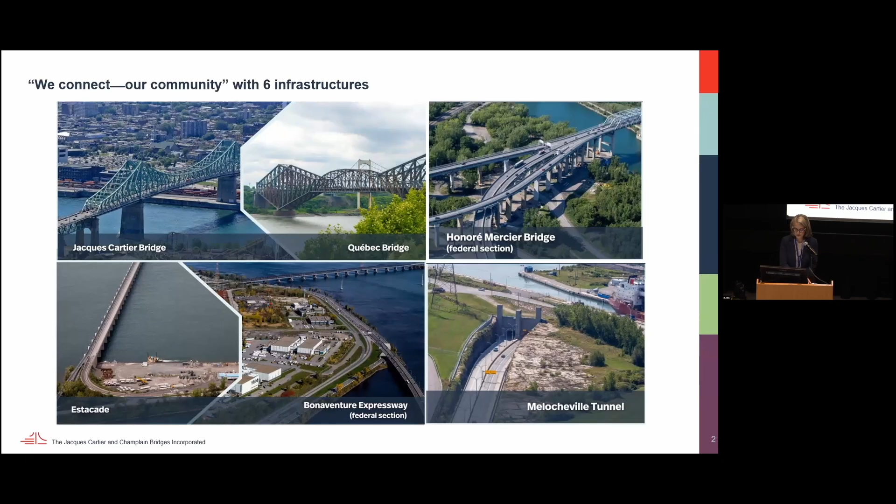Through our proactive asset management approach, we ensure these critical assets remain safe, functional, and aesthetically pleasing for as long as possible. Our team of 187 employees includes 54 engineers, and we are responsible for a total of 82 million trips per year and about 700,000 trips for active mobility users.

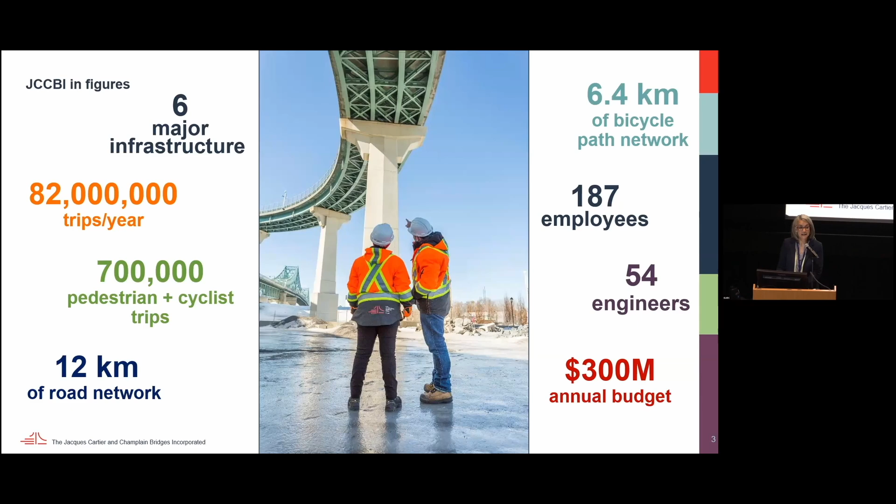Now, let's take a closer look at the deconstruction of the original Champlain Bridge.

JCCBI has managed this bridge since 1978. Due to structural problems, for decades we had to deploy innovative reinforcement solutions to keep the bridge fully open to traffic until its last day of operation on June 28, 2019, 57 years after its opening. I'm sure you can understand how emotional it was for us to deconstruct this bridge that had been under our care for so long.

At the same time, we were eager to tackle the challenge of deconstructing a major 3.4 kilometer, 6-lane traffic bridge without resorting to blasting and while upholding major sustainable development principles.

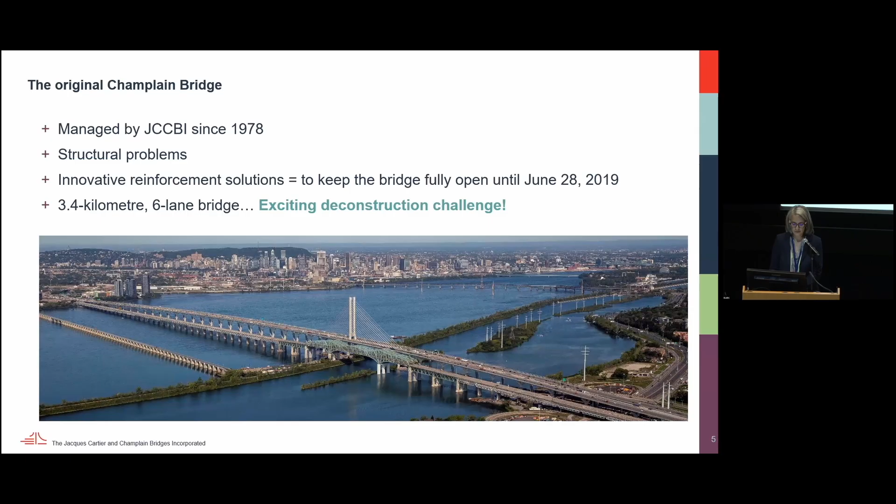Despite the scale of this historic task, we boldly took on this challenge and aimed to go the extra mile. Because even though we knew the bridge had to be taken down, we wanted to leave the community with many tangible ways to remember this iconic structure.

One of the project's most important legacies has been the sustainable development and environmental protection measures that minimized the project's impact and maximized its benefits. In addition to keeping thousands of pieces of the Champlain Bridge from ending up at the bottom of the St. Lawrence River, we ensured that the majority of the 264,000 tons of materials from the bridge would be recycled or reused.

The required 7 hectares of compensation projects would be implemented. Best practices in occupational health and safety would be applied. Research projects would help advance infrastructure knowledge. The freed up land would be developed as public space for the Héritage Champlain component, which will be completed this coming December and which is featured on this slide.

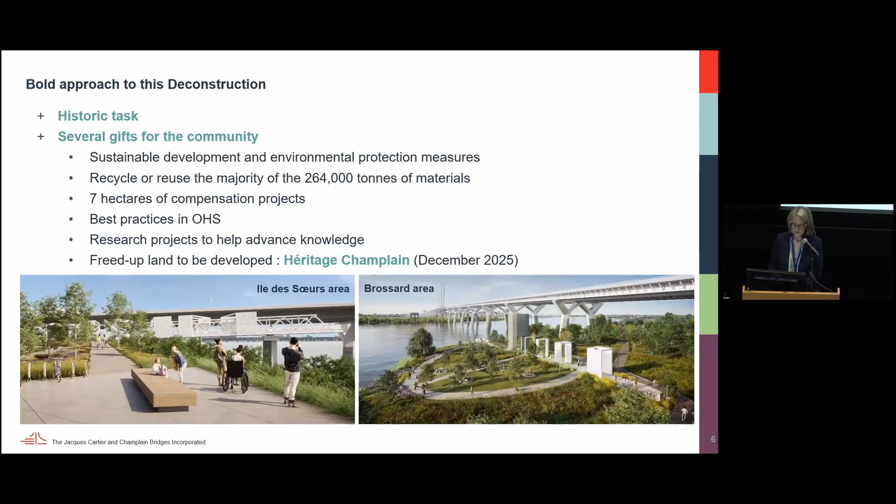How could this bold project, and even more, be done under time and on budget? Our success factors were preparation, preparation, and preparation.

First, we set up a dedicated project team with members who had experience as contractors. Outsourcing is indeed effective when the project authority also has experience as a contractor. This team was supported by a number of consultants from different disciplines, particularly to develop the execution criteria, evaluate methods, and draft the contract clauses that would be both demanding and realistic to ensure the project was a success.

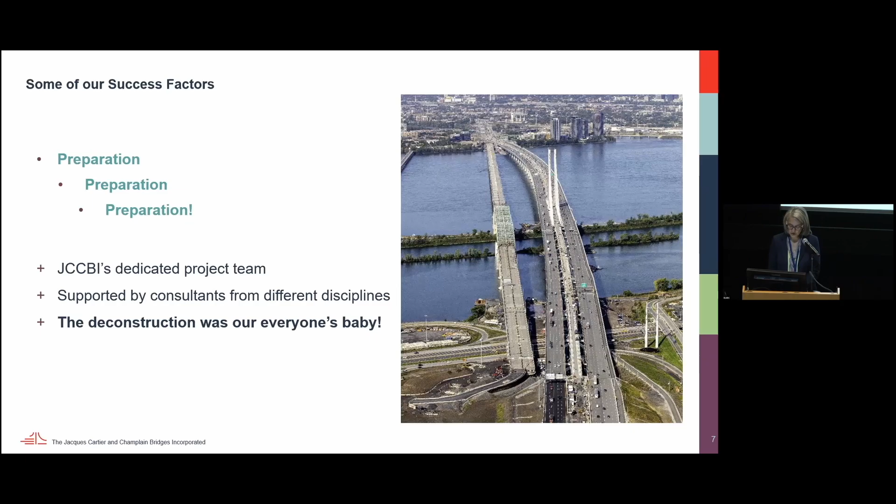At no point did we simply hand the responsibility for the project over to the contractor, as the deconstruction project was everyone's baby.

Our project team put every effort into analyzing the project and preparing the procurement documents and contractual agreements. For example, in the design-build contract, we included requirements for civil engineering work, environmental protection, measures to mitigate and handle complaints, and we also set out clear penalties for non-performance.

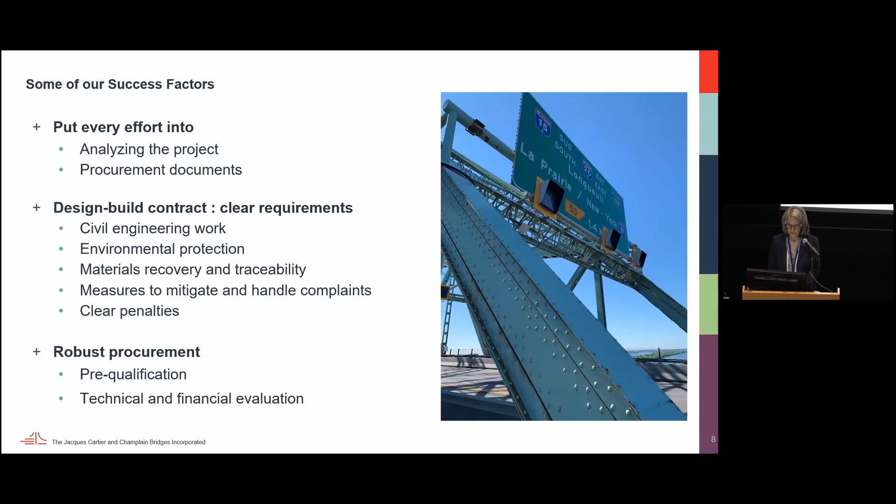We also implemented an atypical and robust procurement process that included a qualitative and a financial evaluation. Another example of our bold approach was the innovative recovery and traceability component for thousands of tons of materials, and these requirements were also included in the procurement documents.

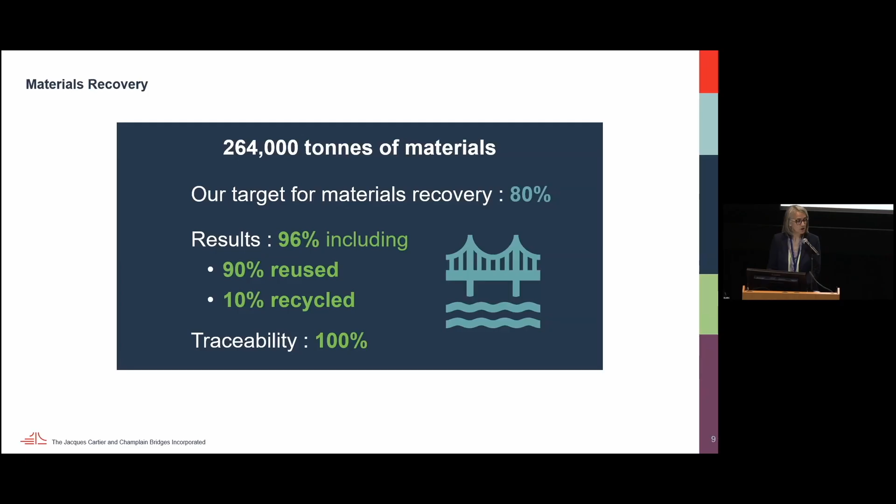The contractor was Nouvel Horizon Saint-Laurent, NHSL, a consortium made up of Pomerleau Incorporated and Delsan AIM Environmental Services Incorporated. They deployed deconstruction methods that exceeded our target of recovering 80% of the materials to reach 96%, with 100% traceability.

During the call for tenders phase, we held extensive discussions with the tenderers and organized 5 workshops to respond to their questions with thoroughness and transparency. Most questions and answers were shared with all tenderers, which allowed us to minimize risks, unknowns, and costs.

However, we weren't able to plan for everything. In February 2020, we announced the winning tenderer, and a month later, we were hit with a global pandemic. Quite the unexpected surprise.

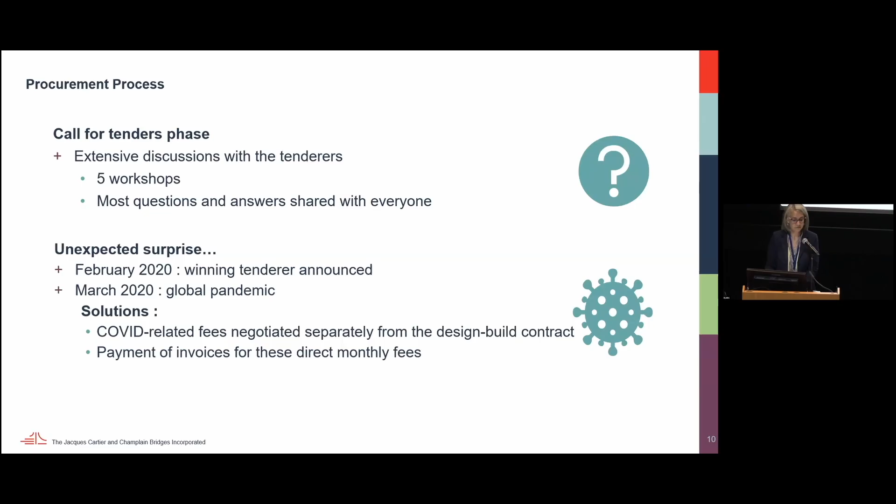One of our solutions to this unforeseen cost was to negotiate the fees related to the COVID-19 separately from the design-build contract. The COVID direct fees were billed and paid monthly, so we shared the risk with the contractor.

From the start of the contract, our team established a collaborative relationship with the contractor. The JCCBI team was thorough, strict, and prepared during the negotiations, but collaborative during the execution. Finding solutions was everyone's business. We also hired a consultant who had experience as a contractor and who helped manage the work. He served as an excellent intermediary between our team and the contractor.

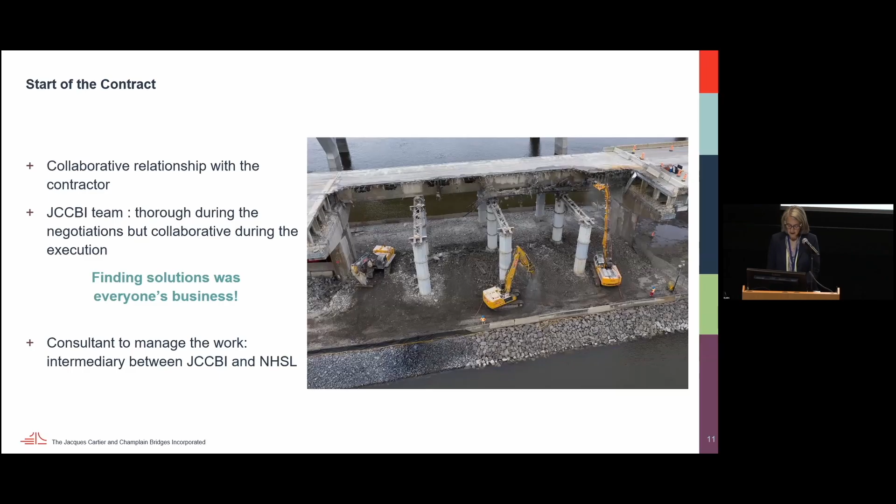Another success factor was our participatory approach, which began prior to the work. As everyone knows, this type of project can't go ahead without social acceptability. The process began in 2019 with 4 information days plus an online public consultation about the redevelopment project Héritage Champlain, planned after the deconstruction. This approach allowed us to interact with the public to ensure everyone clearly understood the project, to eliminate fears, and to determine what the public generally wanted for the Héritage Champlain component.

Throughout the project, we also deployed multiple communication tools, such as a website, hundreds of posts on social media, 24 issues of our Deconstruction newsletter, and 6 public meetings attended by our team and the contractor. We got everybody on board to spread the word about the project and help the public take part in it. Interested people could use all of these tools to stay up to date on the project's progress.

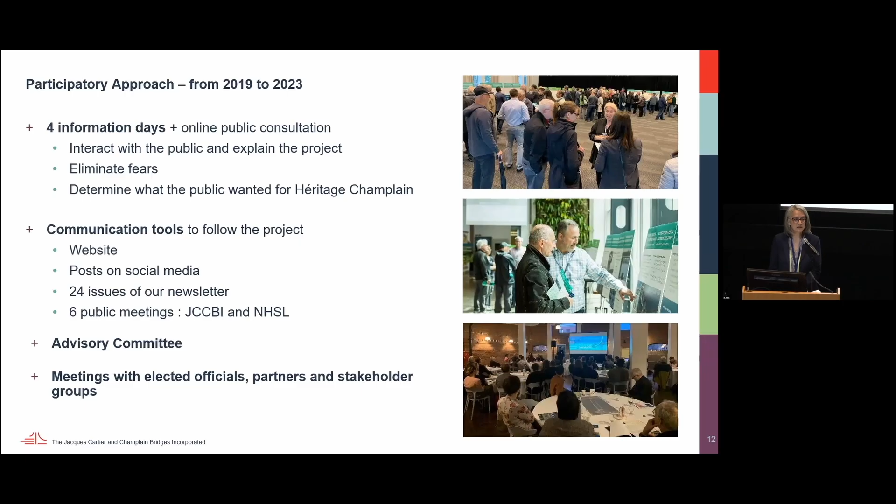We took another bold step in this project before the contract was signed, when we allowed the contractor to mobilize on site so that engineering and inspection work could begin, which helped accelerate the start of construction. This phase is crucial to avoid any of the snags that can be frequent and costly at the start of a design-build contract. Basically, a difficult startup can often snowball into a contract that is difficult to manage.

Once the work started, JCCBI was strict at engaging in frequent and effective communication with the contractor. Executive meetings were regularly held, in addition to the weekly and even daily meetings that our project team held with the contractor as needed. We also kept an eye on potential risks to keep the project on course. We also quickly resolved any disputes so that we could concentrate on executing the work.

Finally, in order to effectively communicate with the public throughout the project, weekly meetings were held between members of our team and the contractor's team, who included engineers and communication specialists. This way, we could fully coordinate the site activities with our communication activities.

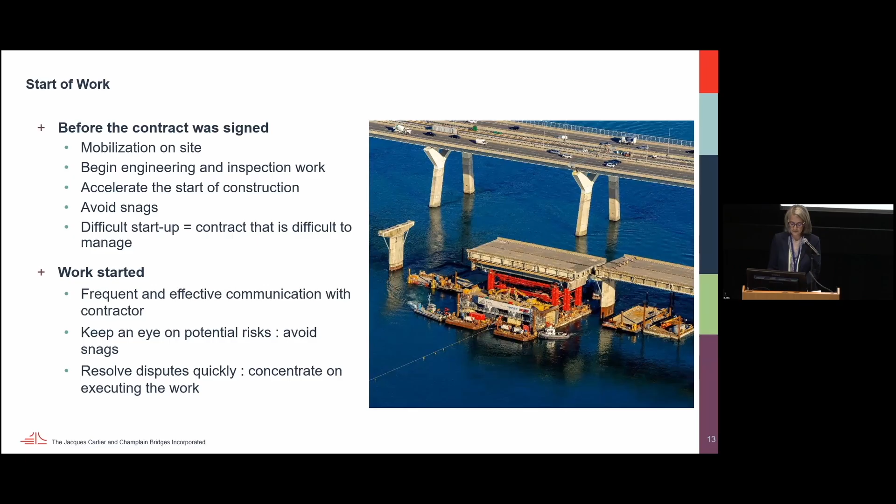There were no surprises, either for us or for the public, which is one reason we only received 3 complaints over 41 months of work. This impressive statistic is also thanks to NHSL's exceptional work methods and the extensive mitigation measures planned throughout the work to minimize the impacts on the public.

This is just an overview of some of the success factors that went into the deconstruction of the original Champlain Bridge. However, this major project included so much more. Let's watch the whole project unfold from start to finish with this video.

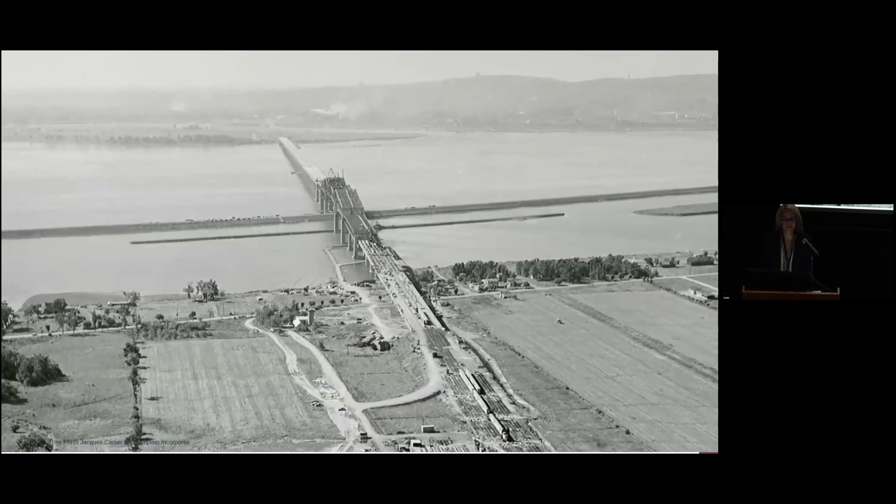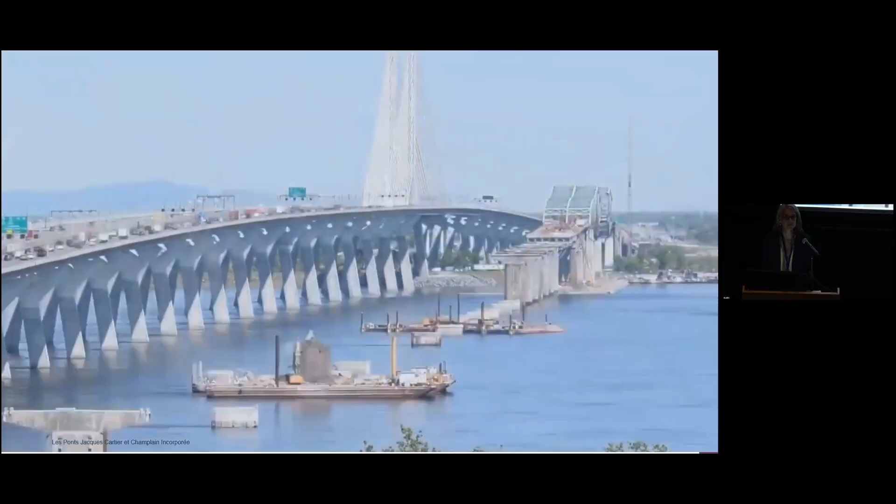The original Champlain Bridge opened to traffic in 1962 and was replaced with the Samuel de Champlain Bridge in 2019. Let's look back at the historic deconstruction of this 3.4-kilometer bridge. This unique in Canada project was the largest in JCCBI's history.

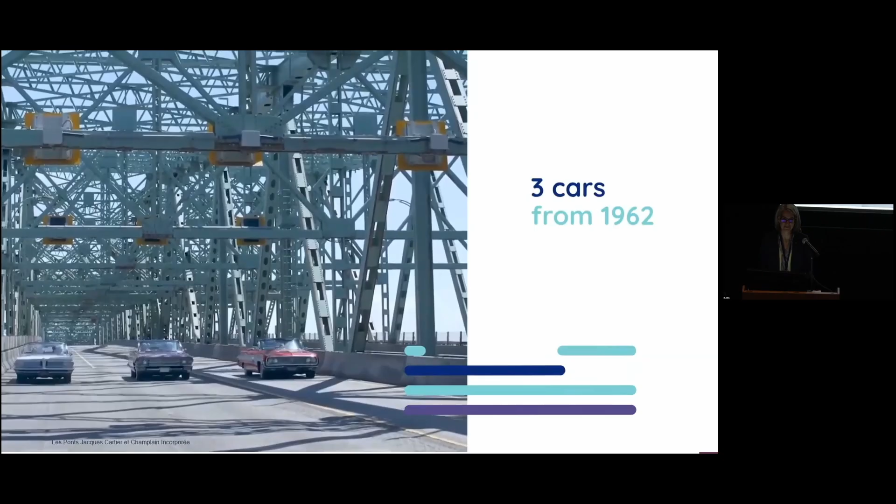The JCCBI team first went through a very thorough process to award the contract. A public consultation was then held on the deconstruction. On June 28, cars from 1962, the year the bridge was inaugurated, were the last vehicles to cross the structure. A few months later, groups of people also got to walk on the bridge.

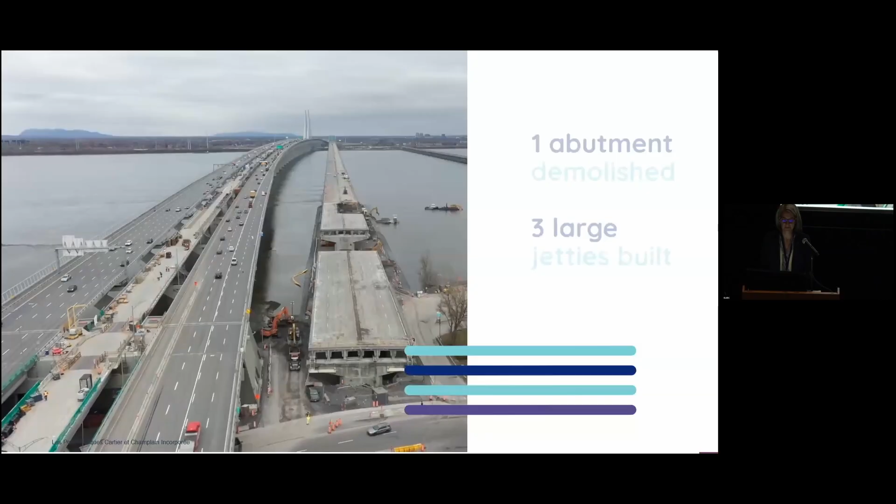July saw the start of the deconstruction work on the Île des Sœurs side using a sustainable development approach. The deconstruction also had to include environmental protections.

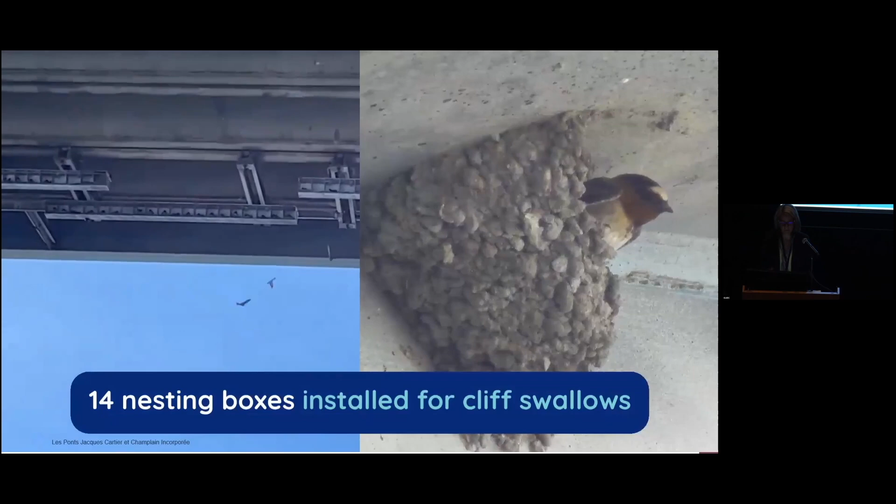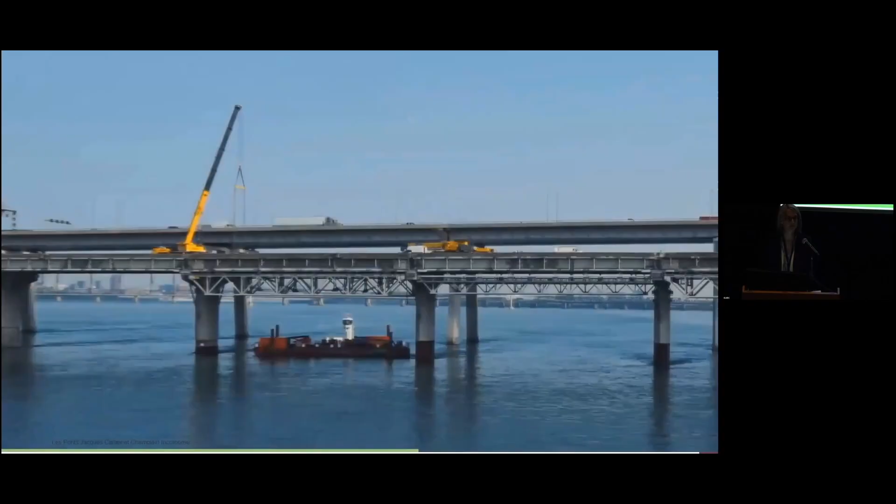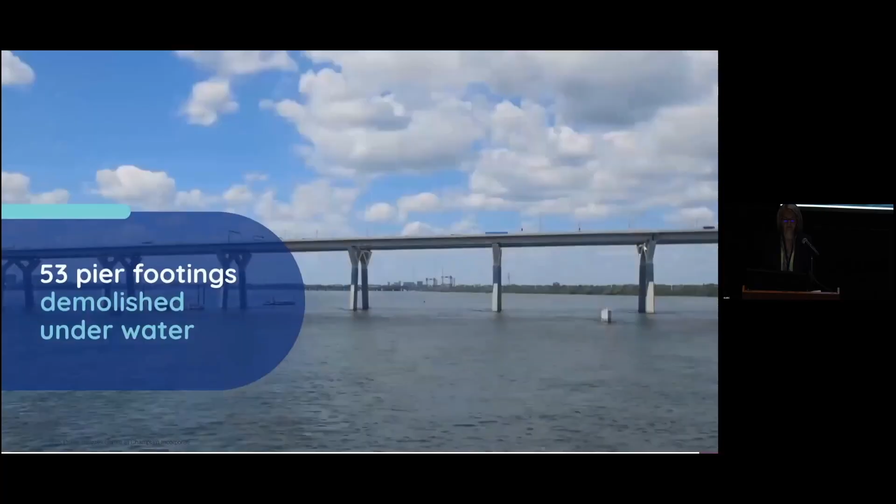The bridge disappeared from the Montreal landscape as the deconstruction made its way to the South Shore. Work on the Brossard side ended with the complete closure of Highway 132. Constant communication kept the public informed on how the work was progressing, and effective mitigation measures limited impacts on residents.

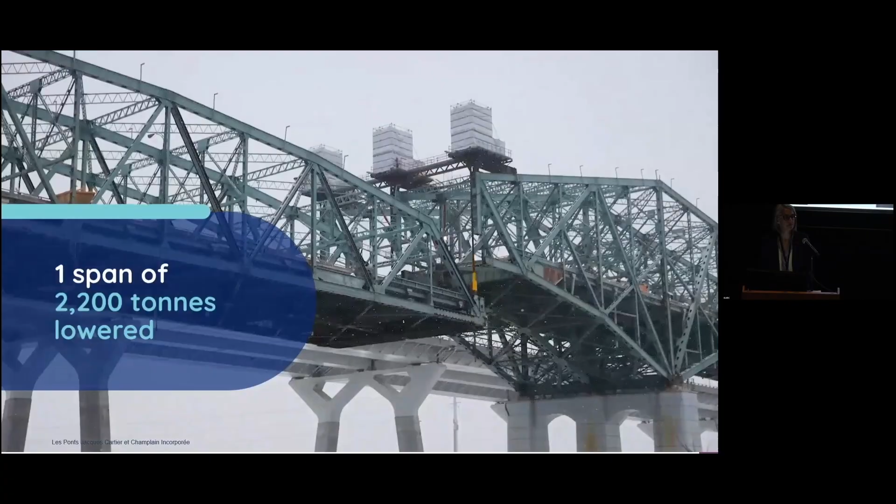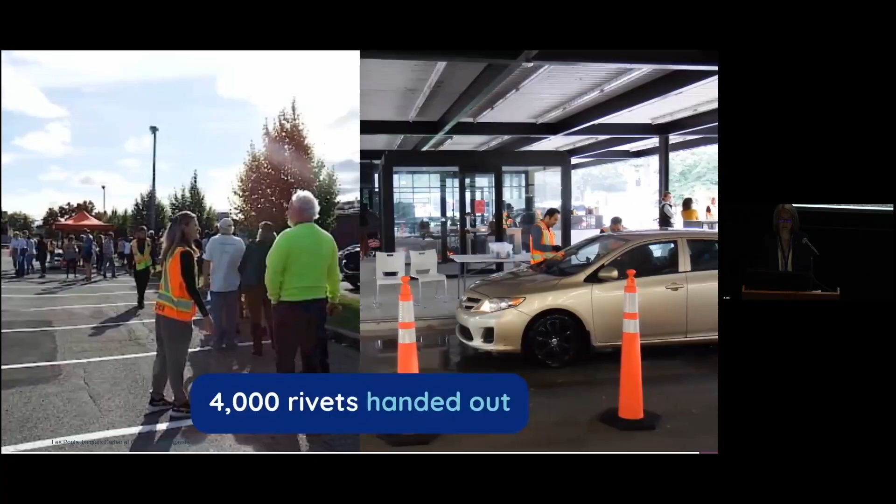A key operation was the lowering of the main span, a true feat of civil engineering. Keepsake rivets were given out to mark the end of the project, and material reuse reduced the project's environmental footprint.

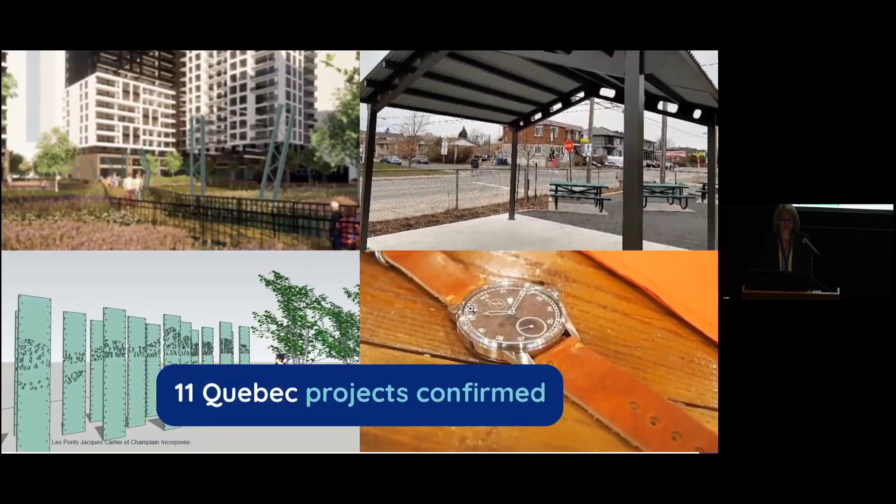The project finished 2 months ahead of schedule and on budget, despite a global pandemic. JCCBI earned 3 honors for the deconstruction. The Canada-wide material reuse competition gave a second life to many steel components, and research and development projects are advancing our knowledge of infrastructure.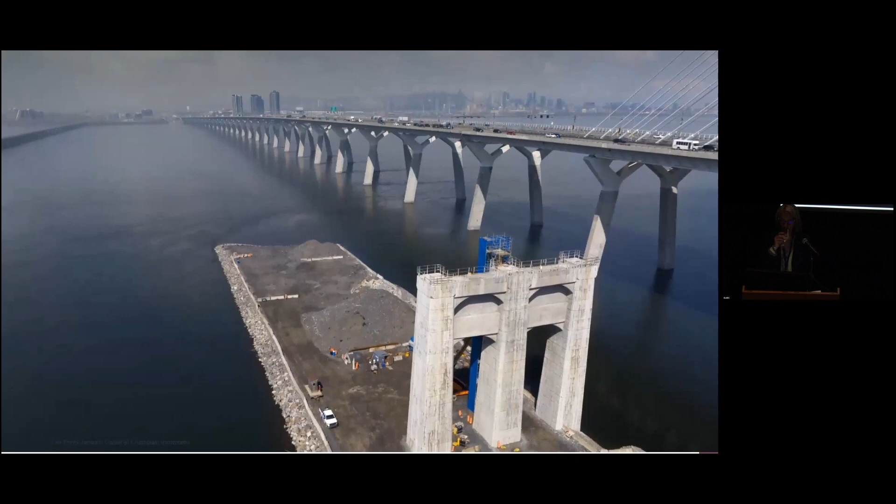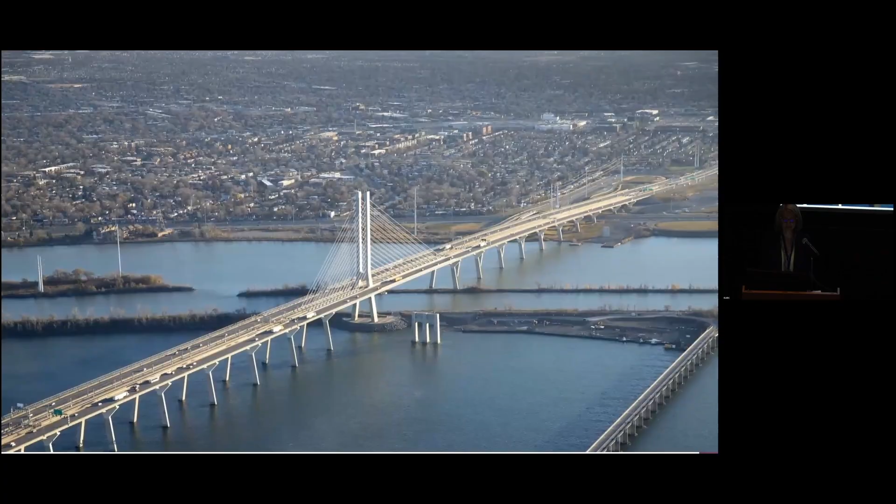The Heritage Champlain project is a tangible legacy that will benefit the community while commemorating the bridge. The original Champlain Bridge stood as an iconic landmark of Greater Montreal's landscape for nearly 6 decades. Its complex and delicate deconstruction was done with respect for the environment and the local population. The JCCBI team is very proud of this achievement.

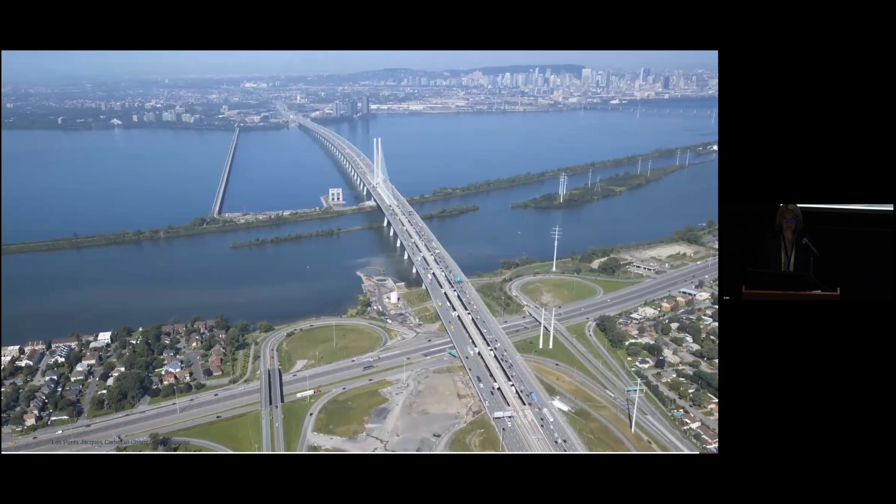As I said at the start, despite the scale of this historic project, JCCBI took a bold approach to the deconstruction that will leave many legacies for the community. I firmly believe that we carried out this major project with exemplary respect for the environment and the community. I am obviously very proud of these results, especially because the contract was completed 2 months ahead of schedule and within the initial budget of $225 million, plus the direct cost of managing the pandemic, which totaled $4.9 million.

Today, the deconstruction work is complete. The 12 research projects are almost completed, and the results of at least 2 of them will have an impact on the S6 Canadian Highway Bridge Design Code. The redevelopment contract Héritage Champlain will be completed in December 2025, leaving a very concrete legacy for the population.

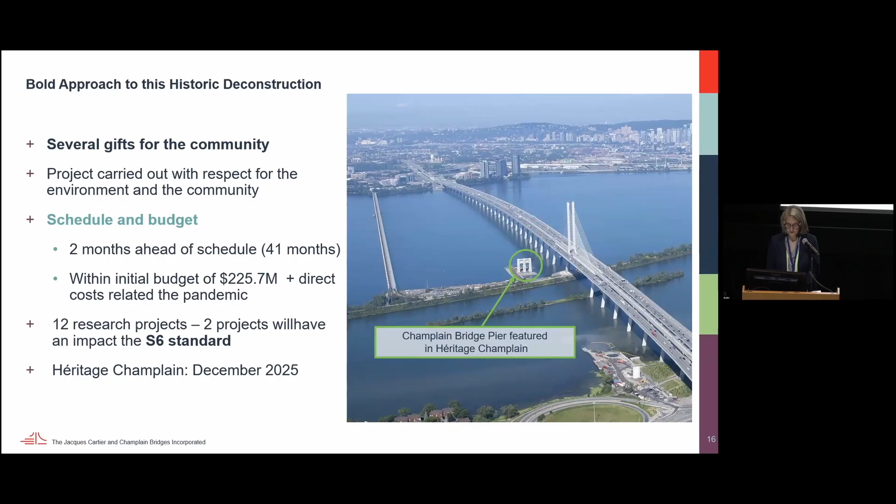Overall, our 3 keys to success included meticulous preparation, constant communications, and close collaboration between JCCBI's teams, our consultants, and NHSL, all of whom I would like to thank sincerely for their immense contribution.

Of course, no 2 projects are the same, and no 2 have the same constraints and requirements. We are very proud of how well the deconstruction turned out, and we intend to learn as much as possible to apply these lessons to our future projects.

So the PowerPoint is finished, but I just want to highlight some of the concrete methods that were put in place for the theme of this conference, decarbonizing the construction industry, so for greenhouse gas emissions, but also environmental requests that we made.

As owner of several assets, we have a major role to play in changing practices with our requirements in terms of the decarbonization of the industry and best environmental practices, and it starts in our procurement documents.

For the deconstruction of the Champlain Bridge, JCCBI provided the contractor with granular materials from the jetties used in the construction of the new Samuel de Champlain Bridge. Our contractor, NHSL, reused 48% of this material to build temporary jetties, a total of approximately 400,000 tons of materials. This amounts to a huge reduction of trucking and improved the project's GHG footprint.

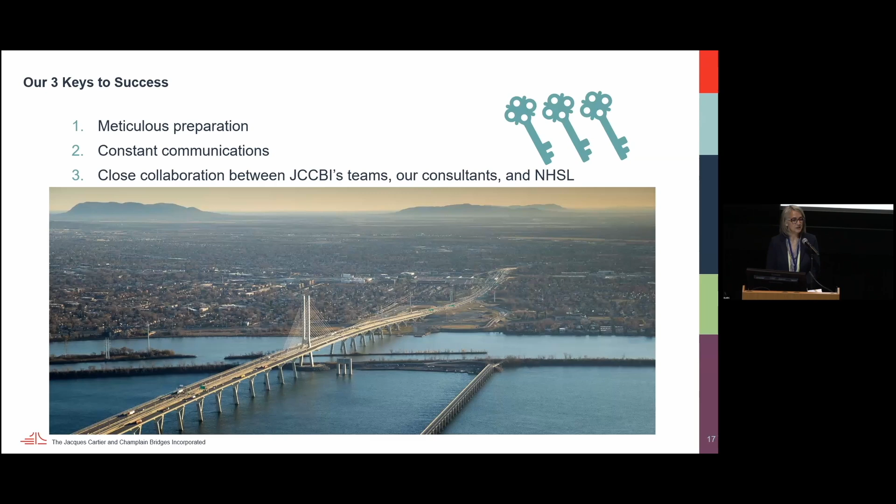We are currently completing the Héritage Champlain redevelopment project. This adds three new green spaces created along the St. Lawrence River. In the end, the deconstruction work was completed 2 months ahead of schedule. That concludes my presentation. Thank you.